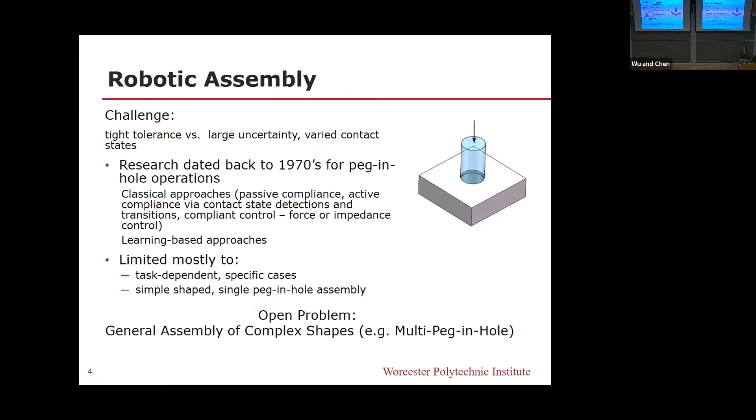So general assembly of complex shaped parts, such as multi-peg-in-hole assembly tasks, remains an open problem. We're interested in autonomous complex assembly with a general, task-independent approach.

As shown here, if we have a double peg-in-hole assembly operation, due to uncertainty between the peg structure and the hole structure, multiple region complex contacts can result. To overcome uncertainty, we have to handle these kinds of unintended but complex contact configurations.

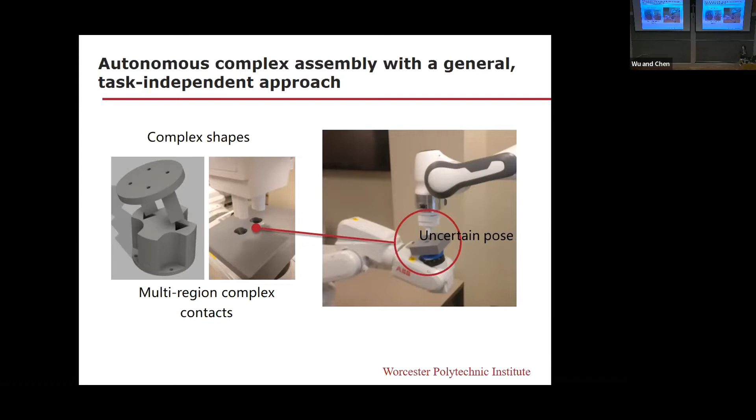So we consider the general problem as having two parts, P and H. I say peg, but it doesn't mean a single peg - I mean a peg structure and a hole structure, P and H. One key thing is to represent these parts in a relatively geometry-shape-independent fashion.

We use a sphere tree representation - a hierarchical representation, but using spheres. Here, this is the last level, or lowest leaf level, spheres representing the peg structure and the hole structure. This is just one example - it's actually an octree, but we now use more efficient sphere tree representation methods.

The whole idea is, just like one can use a triangle mesh to represent all kinds of shapes and objects, using this sphere structure we can have solutions for this assembly problem that are independent of the particular geometrical shapes.

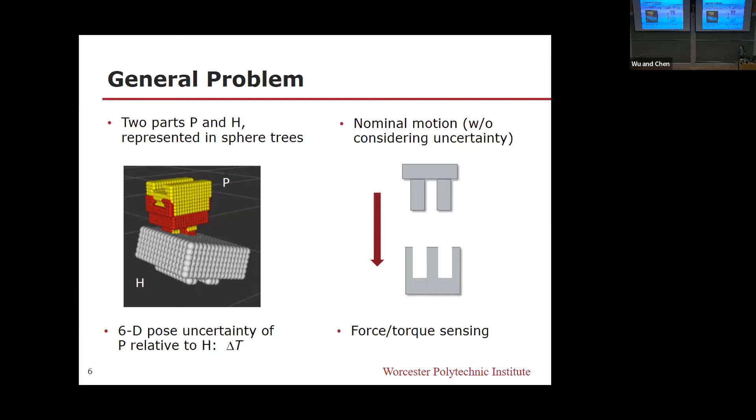We consider nominal motion - in this case just a straight line insertion motion with no uncertainty considered. But we definitely consider 6-dimensional position and orientation uncertainty of the peg structure relative to the hole, and we use force torque sensing.

The whole approach starts by having the robot command the peg structure along the nominal motion to the hole structure. Because of uncertainty, some kind of contact will be detected via force torque sensing, but we don't know what kind of contact it is.

So we predict the uncertain pose of the peg with respect to the hole structure, but the prediction may not be an actual contact configuration - a contact configuration is much harder to achieve. So we start from this.

We start from this kind of predicted pose, then we need to compute the corresponding contact pose.

This is inspired by an approach from haptics interaction simulation. We then use the computed contact pose to compute the force and torque related to the contact configuration, but this computed force torque is, of course, subject to all kinds of model simplification and inaccuracies.

So we further calibrate this to a sensed force torque, and this is a learned model. This is also a crucial step. The output of this model is matched to the actually sensed force and torque in this situation. If they match, we say the computed contact pose is accurate enough with the computed uncertainty.

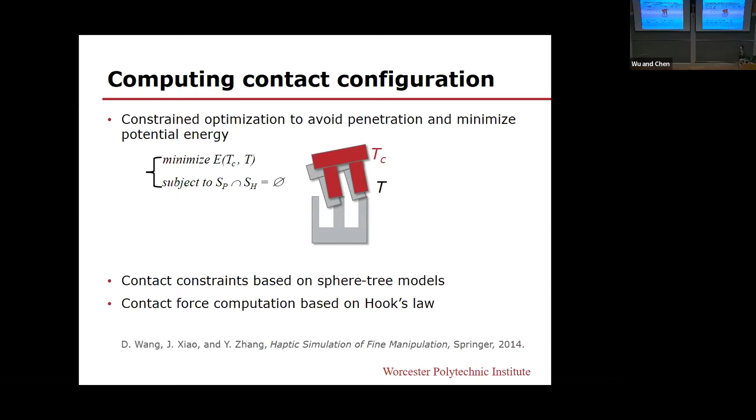I just want to mention that contact constraints become much easier to formulate in a general, uniform way because of the sphere tree model. This is one major reason why we use this kind of representation of objects.

So this just shows some examples. We have a 2-peg hole case. This is nominal motion - it doesn't work. Next, you can see we detect the contact, predict the uncertainty, find the contact configuration, find the force matching, update the goal configuration, and then compliantly move the peg to the goal configuration.

And this is successful. But this example is actually earlier work - it only considered 2 orientation uncertainties, along the roll parameter and pitch parameter.

You can see the robot doesn't know this uncertainty, even though we have the ground truth. The predicted uncertainty in this different case can be a little bit far from the ground truth, but still this is a much better prediction. With compliant motion, the transition can be successful.

This work is still a little bit slow, as you can see, but later on I'll show you another example. We have sped up quite a bit by making a lot of these procedures much more efficient.

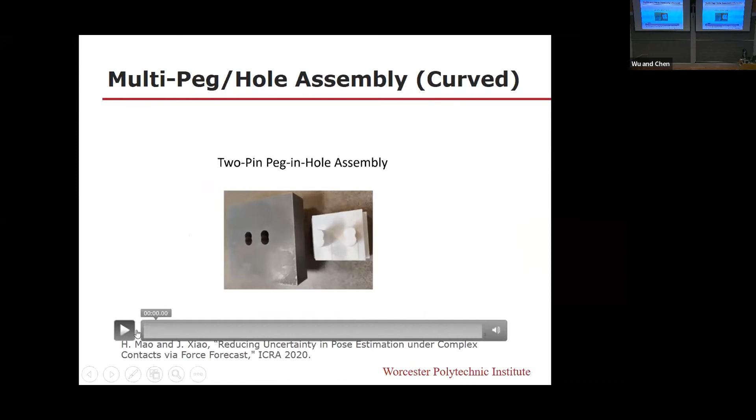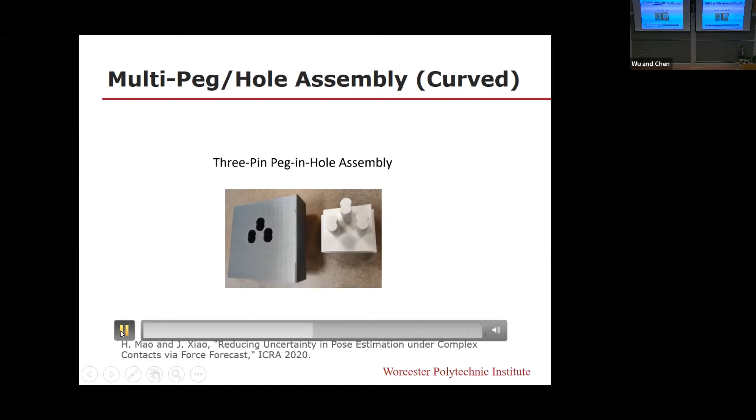I'm going to show just quickly a 3-hole case. Okay, so we also have the 3-hole case, but the arrangement of holes doesn't have to be like that - it can be really arbitrary, it doesn't matter. The holes can be different and the arrangement can be arbitrary, so the whole thing still works. I'm not sure why this is stopping. Hope it's okay - just quickly see that.

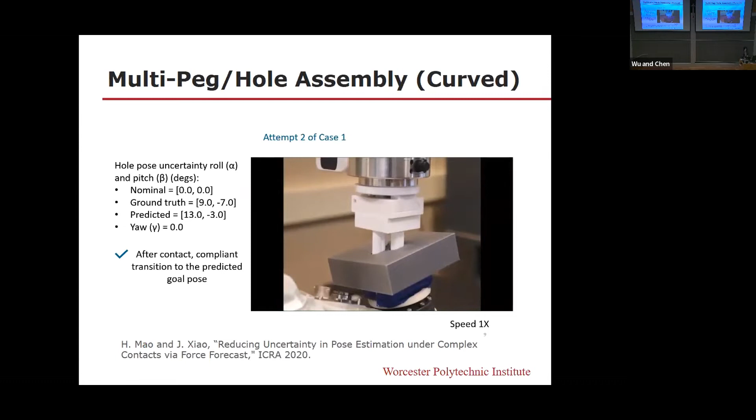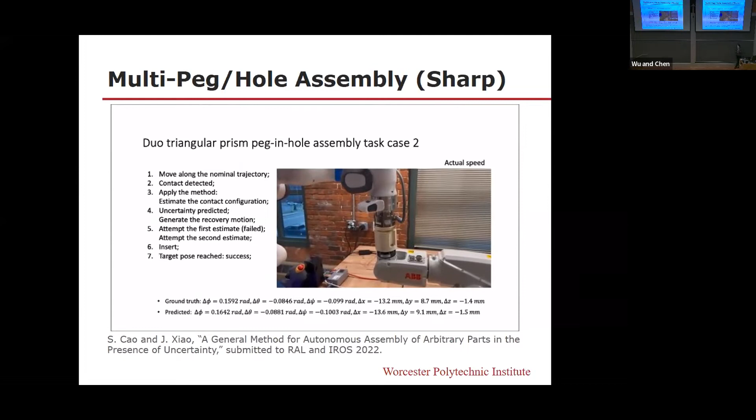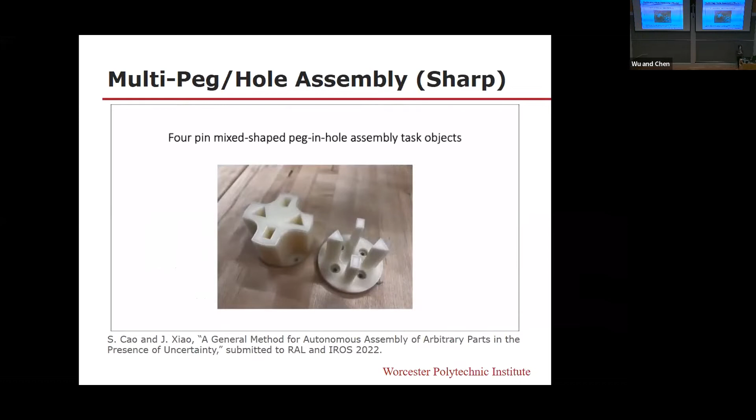You can see sometimes the first prediction may not lead to a successful estimation of a contact pose, and then the whole procedure starts again. You can see on the left side, sometimes it has to do a second attempt of the prediction, but still the task can be successful.

This is actually a 4-pin mixed shape peg-in-hole task. It goes pretty fast, but the 4 pins are of different kinds of shapes.

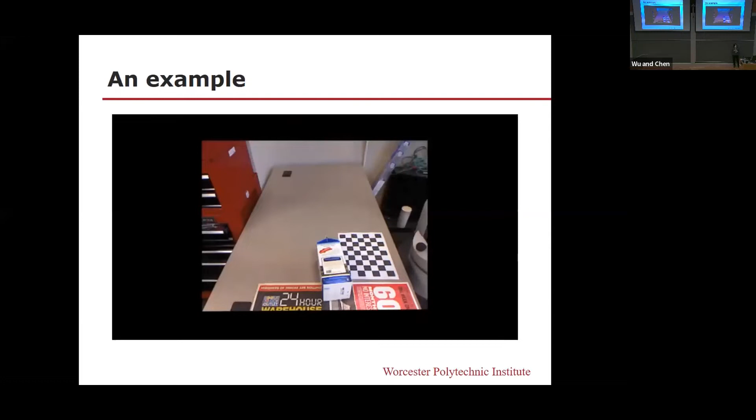So when we think about manipulation, we always want to think of something simpler for the robot to do. Pushing is inherently much more stable. And this method doesn't really care if the push is a pure rotation or not. It doesn't matter, as long as we have overlapping scene images in adjacent images. So it's very tolerant of motion inaccuracies or uncertainty.

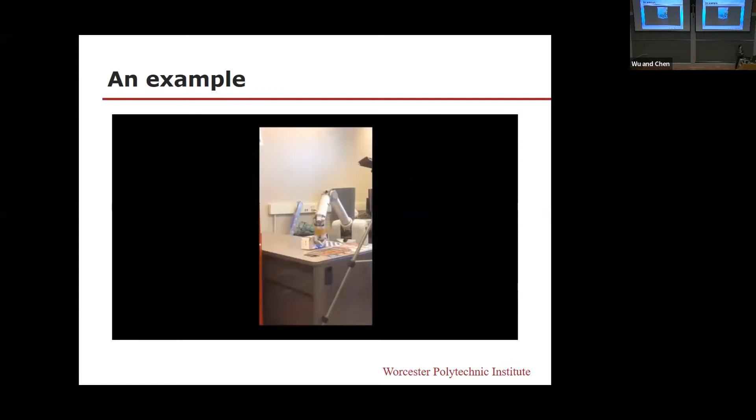And this is view 18 now, and this is the current model. And finally, this is view 19, 360 degrees accomplished. And this is after the global optimization.

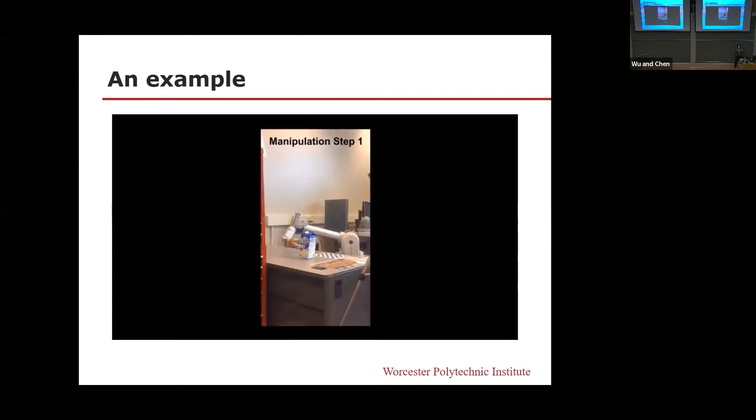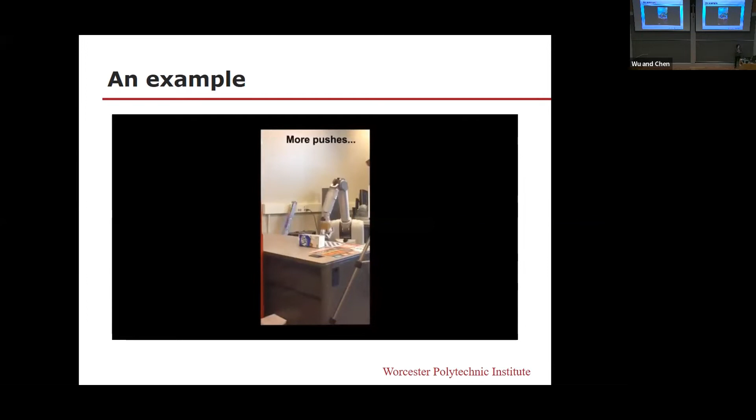So the manipulation is to find a new support surface. As you can see, we have different criteria for that. We want the new surface to make the object stable and also still possible for manipulation. So in this particular case, the support surface is one opposite to the previous surface.

And this is the final model. So this just shows some effect of global optimization. Before the global optimization, you can see the accumulation of errors leading to some gaps here. But after the global optimization, those gaps are gone.

And some other object model, just an image and the 3D model.

So the question is, that's a very engineered environment. We have the object there, and somebody still has to put the object into the setting, and then the whole thing can be done automatically. What if the environment is cluttered?

Okay, like in this case. So we use a continuum robot with a tip camera to try to model using the same method, basically what I described, but put it on a different robot with a moving camera, and try to do a surface-based modeling of a target object.

The surrounding objects are obstacles, something we don't care about but have to avoid. So here again we interleave perception and manipulation. With the first image, the robot already uses that information to try to move the continuum robot. By the way, this is a 3-section or 4-section continuum robot.

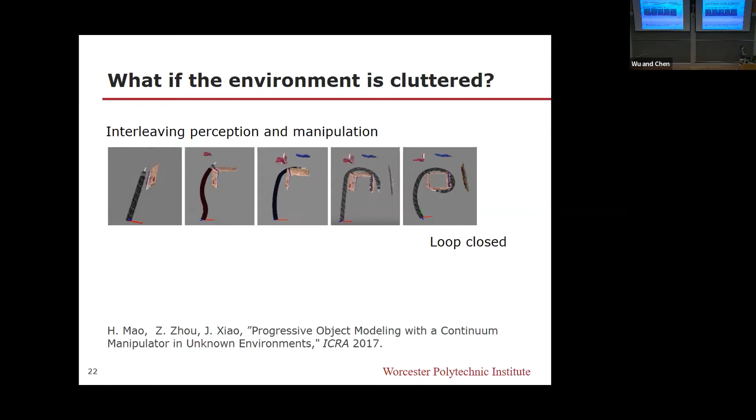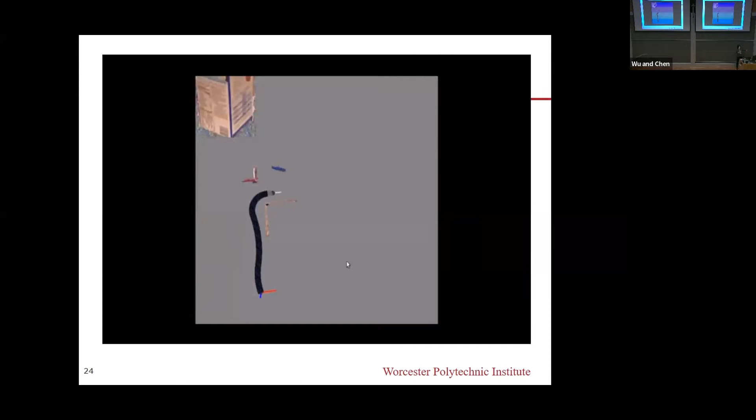This shows just a number of snapshots. As it moves, it sees more of the target object, but it also sees some obstacles. It doesn't try to model the obstacles, it just tries, when doing real-time motion planning, to avoid obstacles during this operation. So this shows the robot started moving. As it moves, what you see in the upper left corner is what it sees in each image.

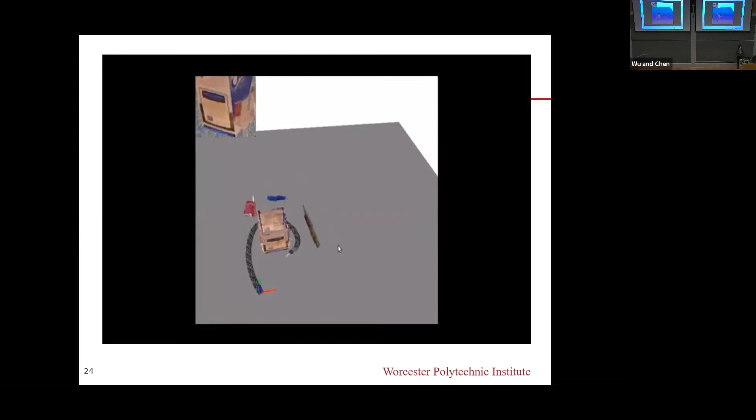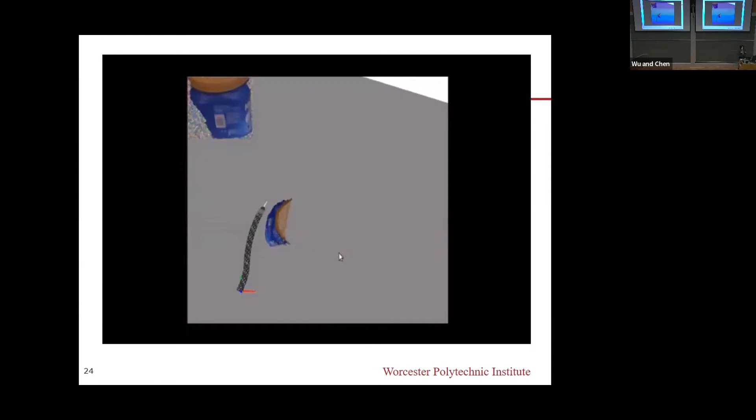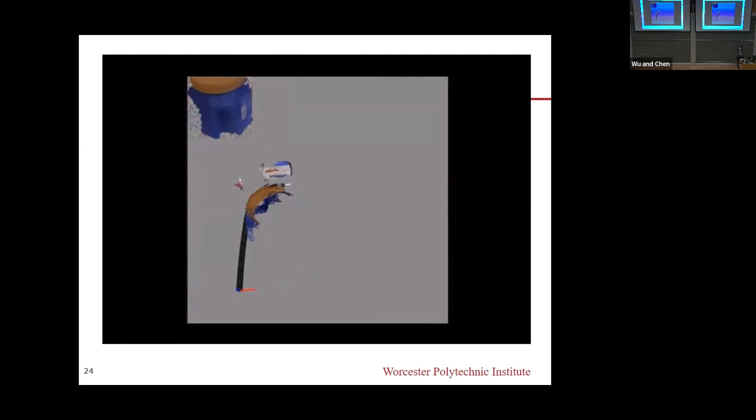So now the loop is closed. Now it's a different object, this time a coffee container. It's larger, so the robot shape, when fully extended, still cannot wrap around this object, but it will use the other configuration, going in the counterclockwise direction, in order to cover the whole side surface of this object.

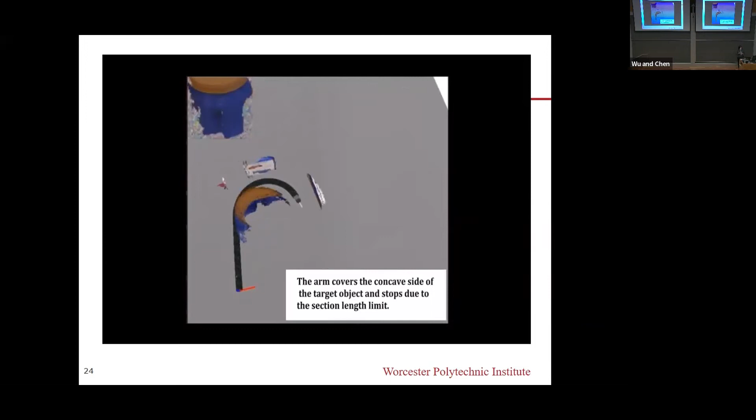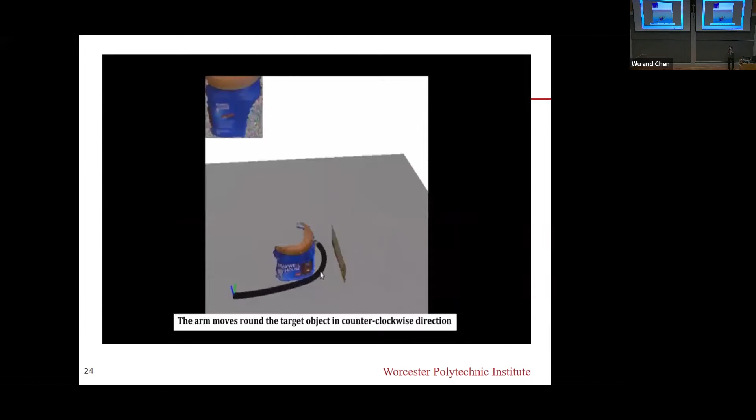What do you use for planning? The planning is a kind of incremental approach, first moving the tip camera to decide where the tip camera should be next, and the whole arm follows using inverse kinematics for this continuum robot. But the motion also has to avoid obstacles it detects. It's real-time, but because it's incremental, it only needs to know what's next. So it's kind of next-view planning in this case.

Okay, so this shows automatic object modeling. Oh, I forgot to mention—what you see is what you get. The total planning time is only about 20 milliseconds for the entire closed loop in the first example. For the second example it's very similar, just one round takes about that time. The first one has about 11 images, enough to cover the whole side to build the 3D side model. We didn't do the top and bottom in this case, but that's something that can be done—we just haven't done it.

So this whole little episode is about using interleaving perception and manipulation based on RGBD sensing to do automatic object modeling. And the method is robust to robot pose and motion uncertainty because it's all image-based.

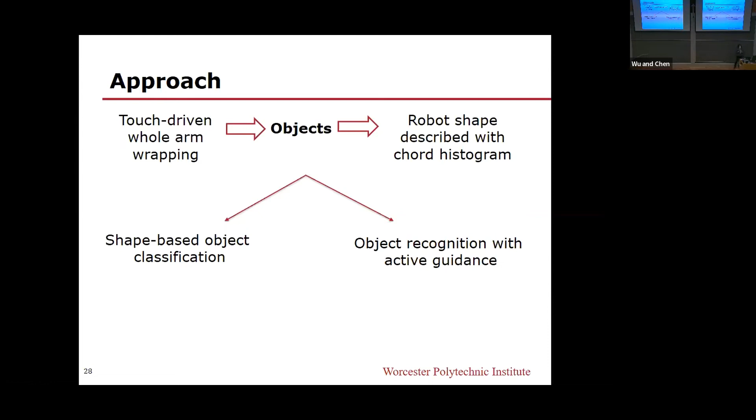So the approach is: we have touch-driven whole arm wrapping of the objects, and then the robot shape is described with the chord histogram. Next, we build a classifier from these robot shapes, a collection of robot shapes for each object. And then we do object recognition with active guidance for unknown objects.

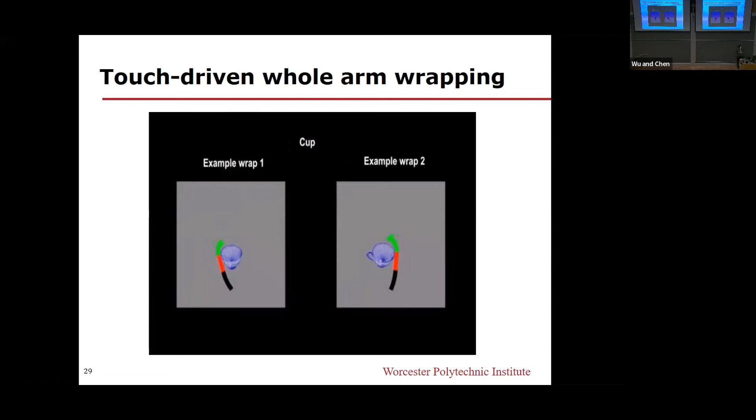This shows the touch-driven whole arm wrapping. The wrapping has a similar idea to what was shown before: it extends the tip of the arm and then changes the curvature incrementally, guided by the touch sensor. The touch sensor gives a simple signal of the normal contact force direction, and the robot just does this type of wrapping around. Of course, this is a simulation, but later I'll show you the real robot actions.

This shows example wraps to encode object cross sections for all kinds of objects. Notice that the object shape and the robot shape wrapping around the object can be totally different. They don't have to look similar, as long as they match, as long as we can use a number of those object-robot shapes to classify an object category in this case.

So how do we do that? We try to capture the 3D shape of the object by decomposing the workspace of the robot into different planes. Then for each plane, we can have a planar wrap around the 3D object. We do that to cover the entire 3D space, if you like.

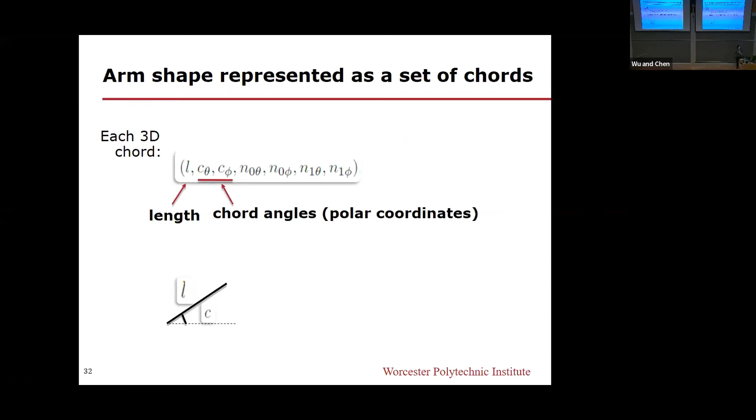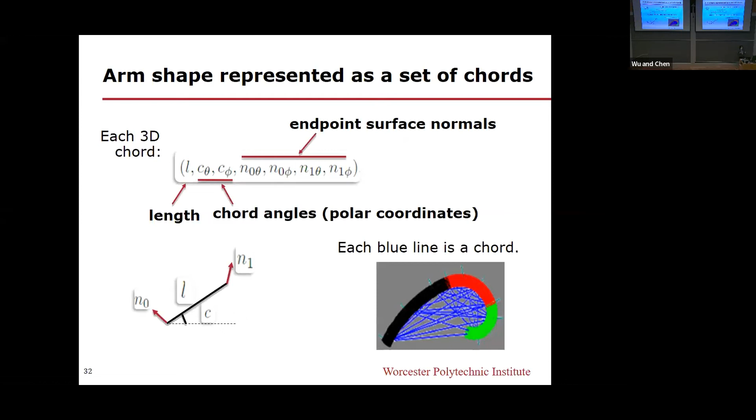We represent the arm as a set of chords, and each 3D chord is represented by 7 parameters: the length, chord angles, and also the endpoint surface normals. So each blue line is a chord, and for a shape there can be many such chords.

So the object representation in this case is the set of chords from different wraps of the object put into a 7-dimensional histogram, where each dimension represents a parameter as shown. We use PCA to reduce the redundancy of the data, and in this case, a support vector machine is trained to classify objects based on chord histograms.

Once the classifiers are done, the problem is: given an unknown object, how do we conduct wrapping for recognition? Here we use the Markov decision process and Monte Carlo tree search. The whole idea is to balance the cost of incorrect recognition against the cost of robot movement for wrapping.

In this tree search, each node is a chord histogram of all the wraps observed so far. Starting from the first wrap, it decides how to add edges as an arm movement to reach another wrap, and so to reach another state.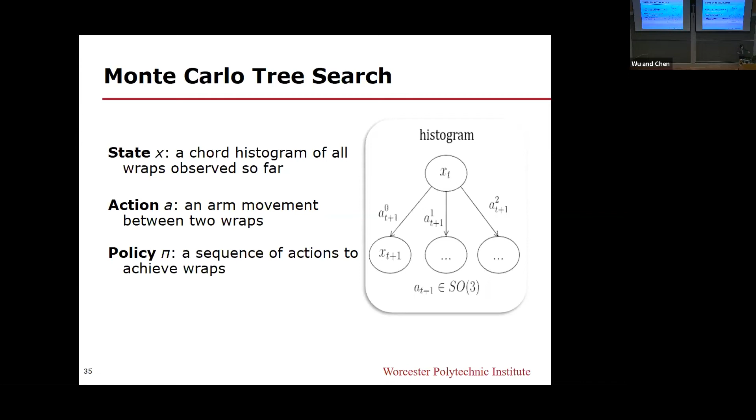The search goes through this whole tree to find the sequence of actions that minimizes a combined cost function. In this case, the cost has two components: the movement cost, which is an accumulation—actually the average movement cost for the steps divided by the number of steps—and the cost of prediction. So it's a kind of weighted sum of the costs.

Now, some experimental results—I'll show you a bit more of the real actions. With this method, we find that 10 wraps are usually sufficient for these daily objects, with 1,500 to 3,000 chords per object, and 100 milliseconds to 1 second per wrap.

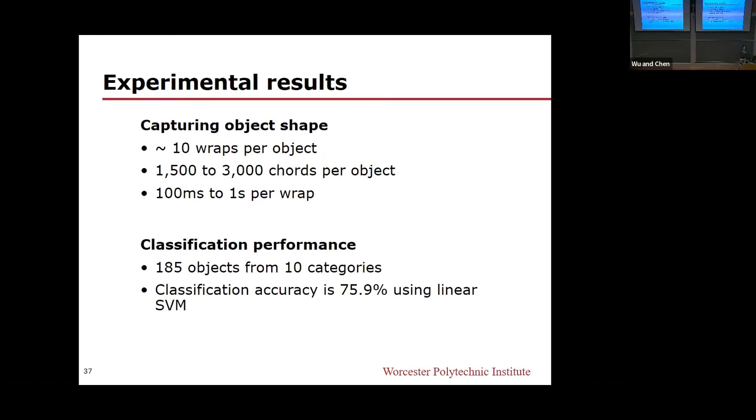Classification has been performed for 185 objects from 10 categories, with accuracy of 76% using a linear SVM. Obviously a lot can be done to improve that, but this is just the very initial work to show this kind of concept. So this is for recognition with active guidance.

Each tree search is called an iteration. So how do you decide the size of the tree? The branching factor is pre-decided, and the length or depth is also pre-decided as a horizon search—just how many steps we want to look ahead before determining the next wrap movement. That defines the depth of the tree.

Each iteration is an entire tree search, but there can be multiple iterations. So it's like multiple tree searches, or you can consider adding branches to the same tree to make it much bushier, to increase the confidence level of the recognition.

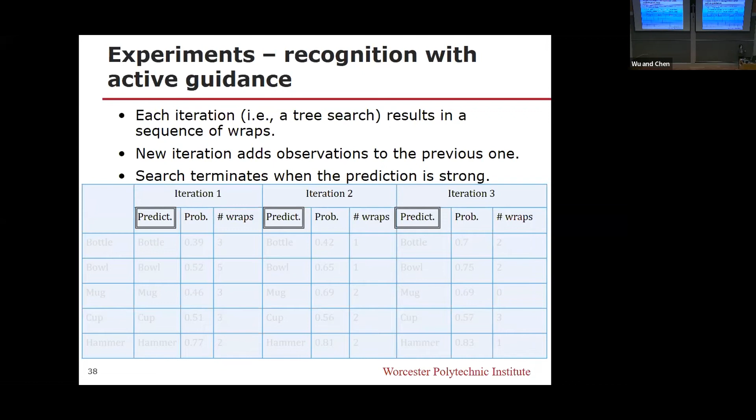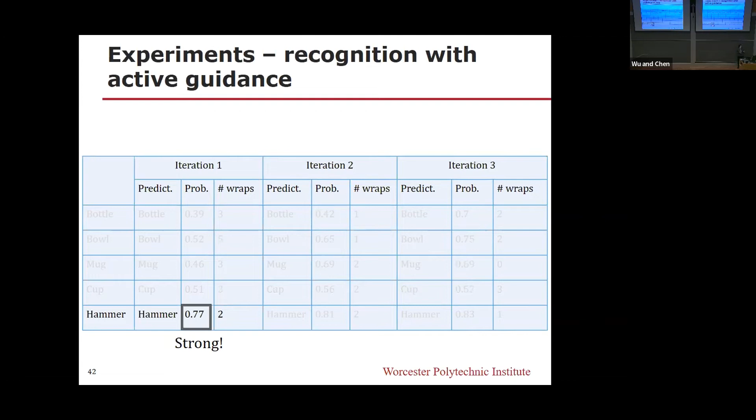So here we have different iterations, predicted object and probability, and the number of wraps. Some examples here: bottle, bowl, mug, and cup. You can see as the iteration goes, the prediction probabilities become stronger, but there are of course more wraps too. There's stronger prediction, but sometimes we can get lucky—in this case, for the hammer, just one iteration or two wraps can give a very strong probability of recognition.

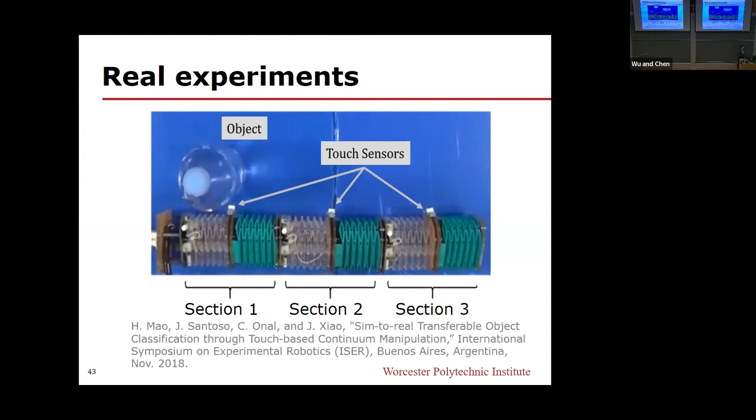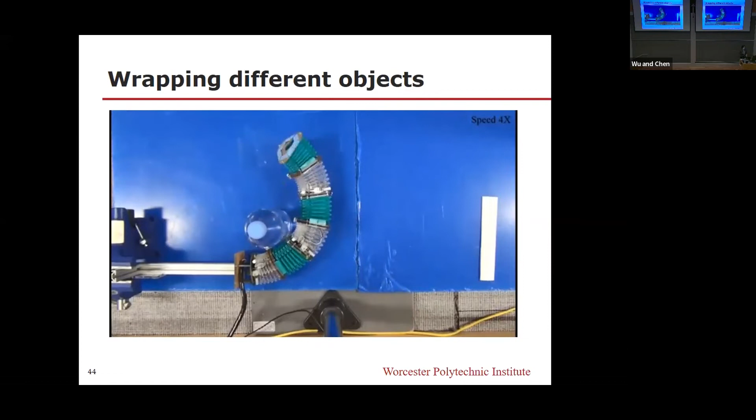So with my colleagues at WPI, Cagdas Onal and his group, we used their real robot to do the real experiments. It's a 3-section robot, showing the touch sensors and this transparent bottle object. This is just wrapping of different objects, all driven by the touch sensor. And box also in this case, but you can already see a little bit of a problem—I'll explain that—and the teapot.

We actually train the classifiers in simulation entirely, and then use the classifiers trained in simulation to apply to the real wraps. This is a sim-to-real kind of transfer. As you can see, for this bottle, the prediction or recognition probability is pretty high and is correct, but this one is totally wrong.

This one is also correct. This is because for this box, actually one of the touch sensors was malfunctioning, so the robot didn't know it actually hit the object at that corner. It keeps on deforming itself to wrap, resulting in some shape. You look at this, the shape is very similar to the bottle shape. That actually shows that for using shapes, one can increase the accuracy of recognition by more wrapping, and by considering deformation or better sensors. We just use extremely primitive, very sparse touch sensors here.

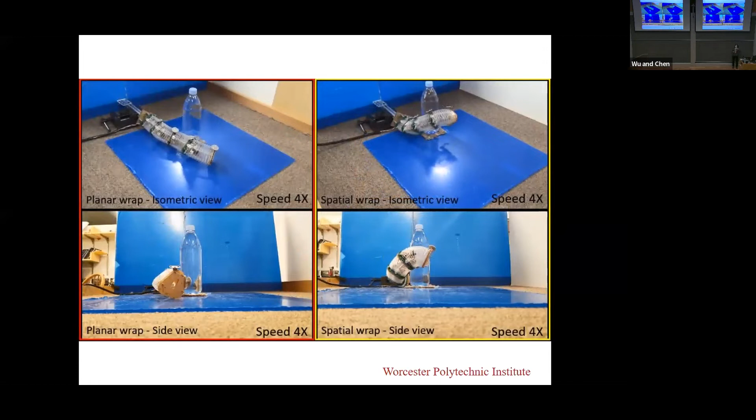So just some objects—yeah, it is moving, and I'll show some real wraps here. Not just the wrap on the floor, but other kinds, we call spatial wrap—other planar wraps, but kind of suspending in the air. These are for different—well this is for the same object, and we can also see things for different objects.

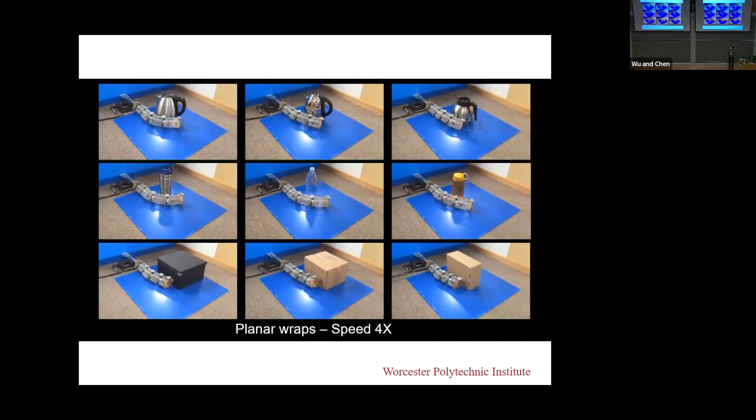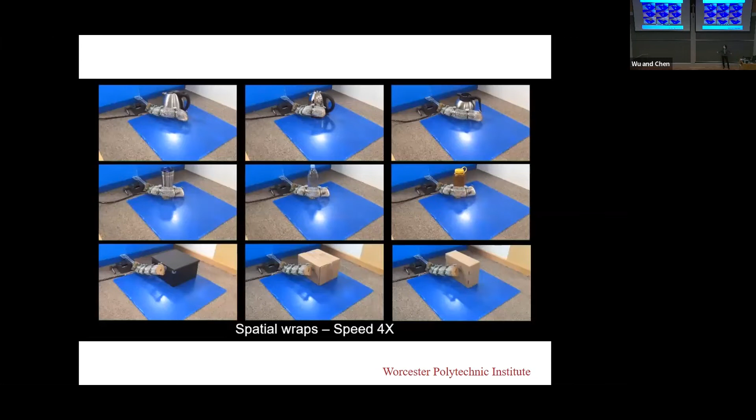The motor calibration of the robot—because you have to use forward kinematics and then the positions of the touch sensors, or even just the joints. So how sensitive is it? It's actually sensitive, I'll show you why. For the one where the wrapping is really just on the horizontal plane, it's not very sensitive, because we do have a way of calculating the shape.

But look at the classification results—when we have spatial wraps, the probability becomes much worse. This is because of a gravity effect. When we did the simulation for training the classifiers, we didn't consider the gravity effect of the real robot, and also the deformation effect is not considered. So in the simulation-to-real transfer, a lot of the real world factors were not considered in the classifier, and that affects the classification results. Also we didn't do enough wrapping—we could do more, but probably not enough in this real case.

So that shows a lot still can be done, but we have shown touch-driven wrapping of objects for recognition through robot shapes after wrapping, with minimum use of touch sensing for guiding action, but not for recognition. This is a great example that action itself is perception, not direct sensing, and it's applicable to objects where RGBD sensing is not effective. But more work is definitely needed to improve the robot, improve the sensing, and even learning—there are so many different kinds of learning methods now, deep learning, reinforcement learning, all kinds that could be considered.

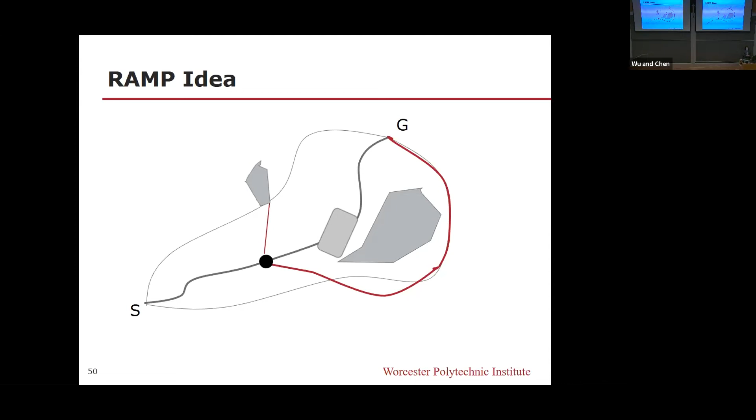As it moves, the object moves, and it realizes the first trajectory it found isn't good enough. It switches to the newly ranked good trajectory, which is also different from the initial shape because it's constantly evolved by itself. As the robot comes here, it just switches. Of course, it can switch multiple times throughout the course of trying to reach the goal.

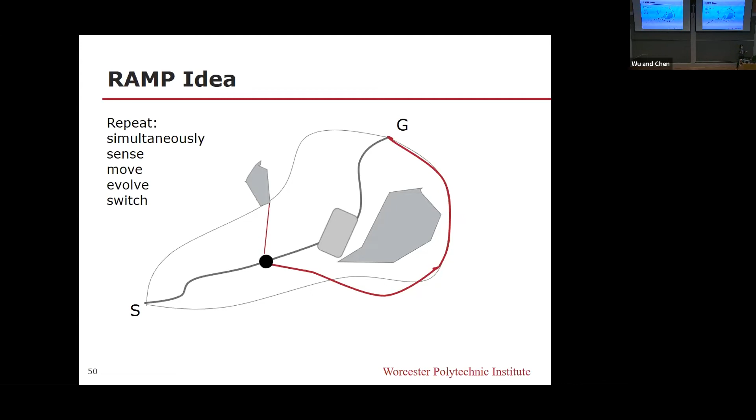Repeatedly, it does simultaneous sense, move, evolve, and switch to better trajectories. This is a pretty toy-like example, but it shows the idea of what the robot sees and how it changes its motion. It has no idea at all about this environment—just uses a little bit of depth sensing to guide its motion. The blue robot and the person are all obstacles.

More recently, we considered task-constrained real-time adaptive motion planning. The difference here is we have task-constrained trajectories and also non-task-constrained trajectories, all in the same population. The robot will have to switch based on the circumstances—sometimes it has to release the task constraint to avoid obstacles, and sometimes it recovers.

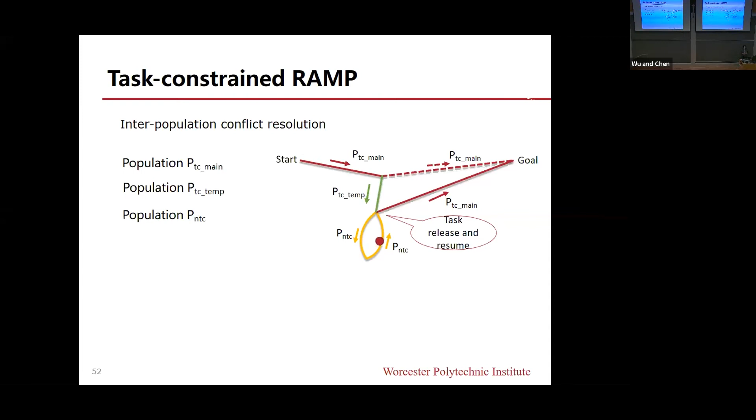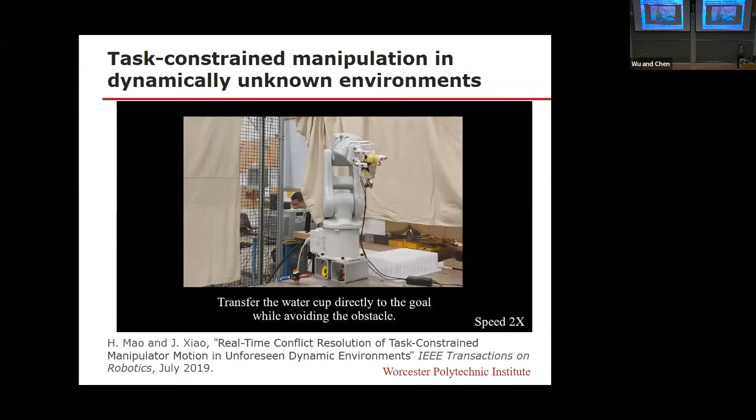This is a robot trying to move a cup of water without spilling it—that's the task constraint case. But then there's a dynamic obstacle and it has to avoid it. Sometimes it can avoid the obstacle while maintaining the task constraint.

Sometimes it has to find an intermediate goal to put the cup down and wait, also avoiding obstacles until the obstacle is away, and then it resumes its motion. You can consider this a robot waiter in a dynamic environment having to do maneuvers like this.

We don't hard code anything. This is the planner using detection to decide where it goes.

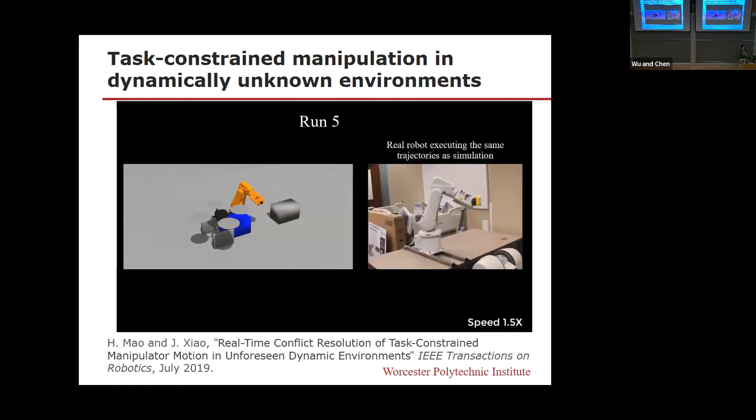Finally, I'll use a couple minutes to talk about semantic SLAM in unknown environments. We know SLAM is for simultaneous localization and mapping. Semantic SLAM—I'm sure Costas and others are working on a lot of semantic characterization of the environment—is to capture and map the semantic information, semantic objects in the map for SLAM.

But related work either hardly considers the data association at the semantic level, or uses some point representation—a low-level representation of semantic objects—which is difficult to do real-time operations with.

So we considered a semantic SLAM method with autonomous object-level data association. The whole idea is we use a method like YOLO v3 to identify objects in the scene with a 2D bounding box and a label. Then we fit that object with a quadric shape for 3D size and shape capturing, also with the position and orientation of the 3D objects.

We build this into the map, registering these as mapped objects. Now, when a new scene or new frame is considered, we do an association—we map the new object to all the mapped objects by semantic information, using hierarchical matching first.

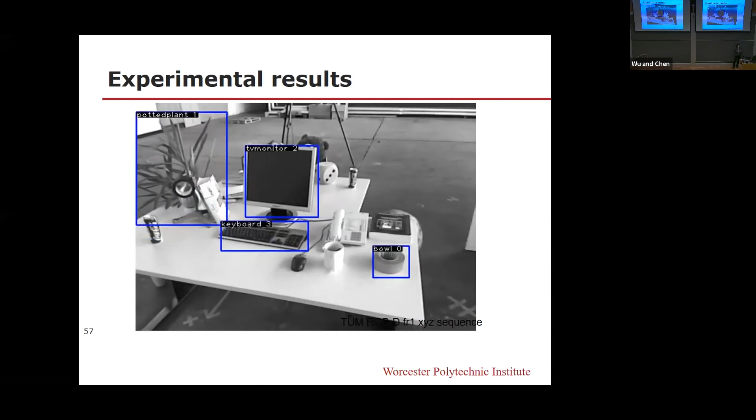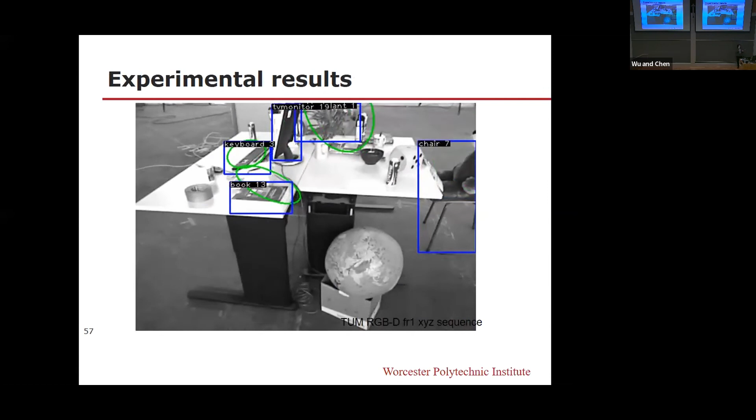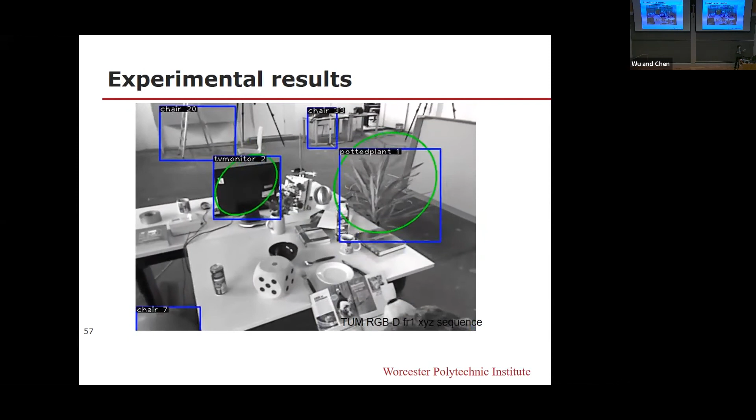This is the TUM RGBD FR1 XYZ sequence, and we use that to try our algorithms. YOLO v3 is used to detect objects with labels, and then we put the quadric to capture the shape. You can see the labels from one frame to another. If the labels don't change, that shows they're same objects.

And this is real time. We also used 3D high-level semantic information for aiding loop closure. Loop closure detection can be a problem. Using low-level ORB SLAM 2 or ORB SLAM 3, a lot of times very similar scenes that are considered the same cannot differentiate the detail if the details look very similar.

So we consider using a 3D semantic co-visibility graph of the semantic objects. Each node of a co-visibility graph is a semantic object, and we add an edge if two objects are observed together for 3 times. For each frame, we compare this co-visibility graph with the next frame to see if they really represent the same location, seen or not.

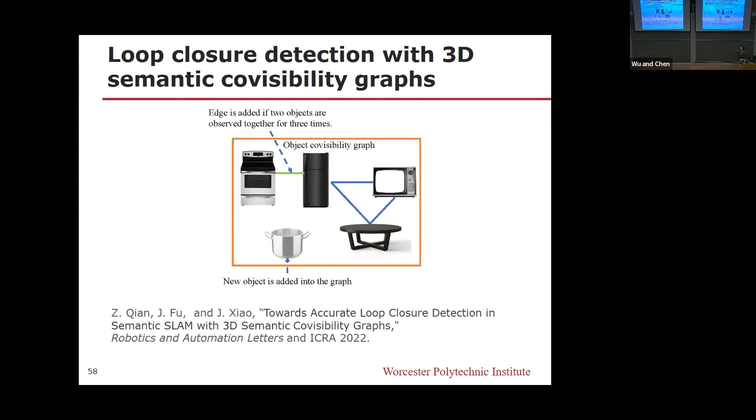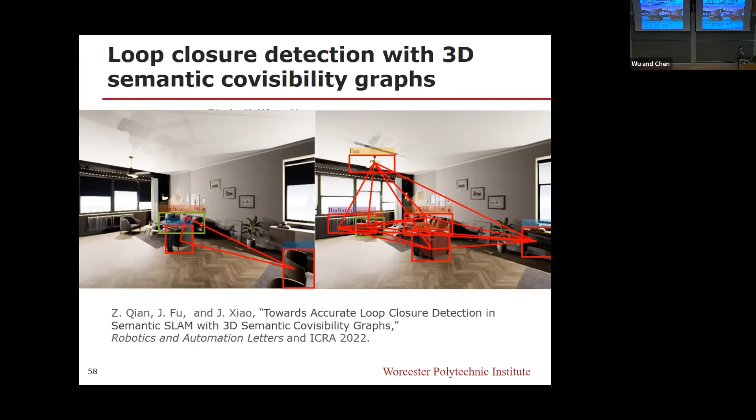Okay, I think my time is up almost. So just to summarize, I've introduced a bit of research in these 4 areas. Of course, in each area, more research can be done and more interesting things can be explored. But also interesting is to see the connections between them - we see a lot of SLAM work or real-time planning work, but SLAM and real-time planning really should be combined in order for the robot to be really successful.

And it's not just about mobile robots - it's about manipulation, manipulators, and so on. Object modeling and robotic assembly can also go hand in hand. Assembly is not just in the industrial setting - we have a lot of daily life assembly, just putting things together in a very tight clearance tolerance, which requires the handling of these strategies and so on.

So these are the students involved in the research I presented, and the collaborators, including, of course, Kostas here and Mabel. I still really appreciate the whole idea - I think this was so cool.

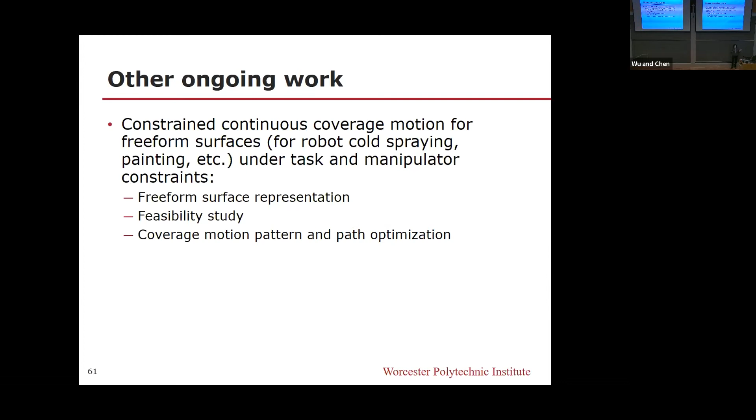Some ongoing work - I have students doing constrained continuous coverage motion for free-form surfaces, for robot cold spraying or painting. It was really very applied problems at the motivations, but then we discovered, under task manipulator constraints, we discarded freeform surface representation - a very good one for robot path planning, but with a manipulator it's not really there. We also did a feasibility study - given a robot, given a surface, you have a lot of parameters: where to place the robot, where to place the surface, and the joint constraints and task constraints - do they all match? Can we do continuous coverage of the whole thing or do we have to divide it? So, feasibility study, and finally coverage motion pattern path optimization - we've done some work in that.

And also a student has been working on autonomous exploration of unknown structures for 3D reconstruction. That's really a combination of the traveling salesman's problem, art gallery problem, and SLAM. This shows just the scope of things, and he's put a lot of effort into trying to build an efficient data structure or management structure for all the data in this kind of process. This is also ongoing - a huge effort.

Okay, so that's it for my talk. Thank you very much.